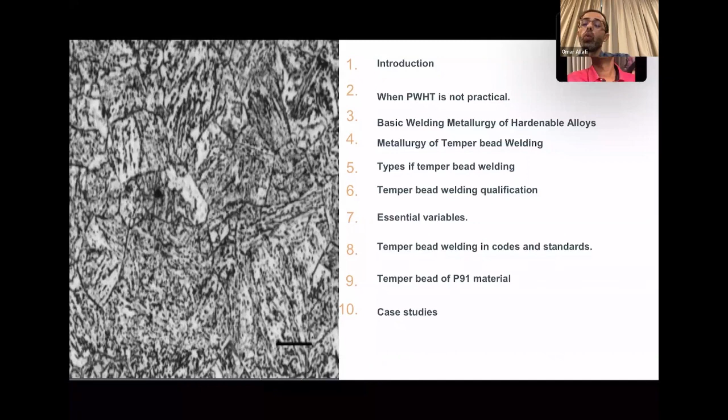We'll have a look at how temper bead welding is covered in different codes and standards, and different codes and standards have a lot of different things to say about temper bead welding. I'll also give considerations we should take when doing temper bead for P91 material, and we'll share a case study.

As an introduction, temper bead is aimed at controlling the mechanical properties of a weld joint and heat affected zone without the need for heat treatment. It provides the same mechanical properties as heat treatment. This technique was adopted in 2004 in ASME Section 9, but that doesn't mean it was not in use long before this date.

We have a record of using temper bead welding since the 1980s, especially in nuclear plants where accessibility is a concern. The first technique used in the 1980s was the half-bead repair using SMAW electrode.

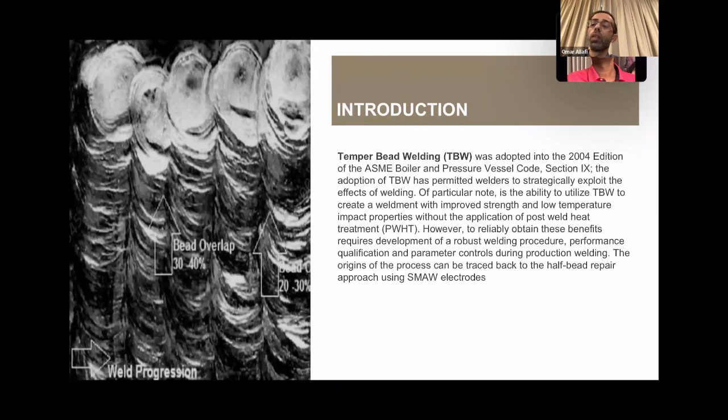So how did it come to existence? If you look at the difference between single pass and multi-pass welding, you'll notice that in multi-pass welding, the residual stresses are much less than in single pass welding.

This is in part because the small welding filler size we use when welding a multi-pass joint will temper and normalize the weld and base metal, and also refine the grain size of the heat affected zone.

As you can see here, this is a weld joint welded using a small filler of 3.25 mm, and the white area is the recrystallized area, which is affected and tempered by the subsequent weld runs. But here the white area is much less, so tempering and refining is not as effective.

In addition, the small electrode size results in a smaller heat affected zone, as shown here. This is how temper bead came to existence.

So they asked: can we set forth critical parameters to control the mechanical properties by applying the subsequent run, ensuring that the hardness and toughness do not exceed the limits in the base metal? This is where it started, and as I said earlier, it started with the half-bead approach.

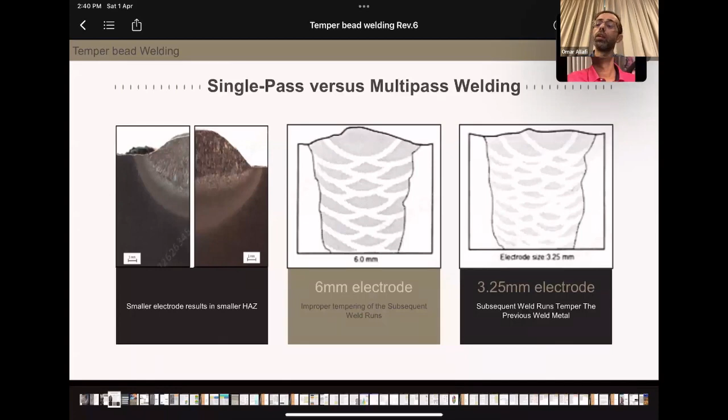When it comes to PWHT, I always ask this question: what is wrong with PWHT? We don't tend to look for alternatives to PWHT when we are manufacturing or fabricating a new vessel. No, we don't do this.

So applying PWHT becomes a concern when you don't have time to do it. This is applicable when you're in a shutdown or turnaround, or sometimes when you don't have accessibility. So time here is the main concern.

You give me time, and all people in the inspection field or welding field know that if you give me time, I can give you everything. So here the most critical factor that governs the repair methodology is time, and we know that PWHT is time consuming.

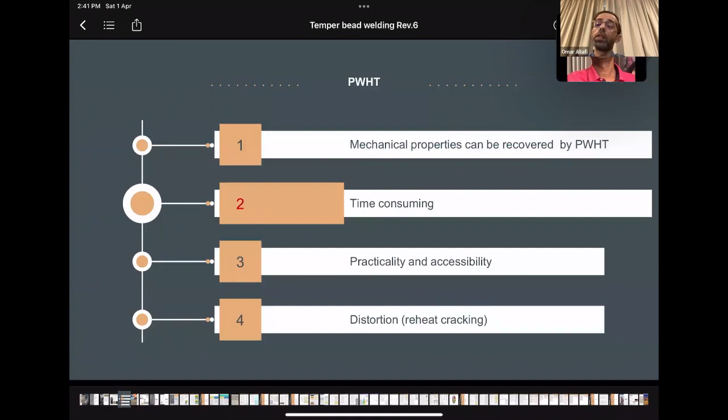In addition, it's not always practical, and can itself result in distortion or reheat cracking. So if there's a way to ensure or adjust the mechanical properties of the base metal and heat affected zone without the need for PWHT, that would be great. And as we'll see in the upcoming slide, temper bead can do this.

Before we go to this, I would like to give a brief introduction about the metallurgy of hardenable alloys in the welding effect and how welding will change the mechanical properties.

Welding will subject the base metal to a high temperature that can result in creation of the heat affected zone and increase the hardness, and sometimes result in enlargement of the grain size because of the fast cooling after welding. So this heat affected zone is the concern. This is where the highest hardness can result after welding. And this is where we have a coarsened grain area where toughness might be impacted.

It is clear in this graph that the coarsened grain area is adjacent to the fusion line of the weld because of welding. This, of course, is because it goes above the transformation critical temperature, and there is a phase change that will occur from ferrite to austenite, and upon cooling, the martensite will form, and upon heating, the grain size will enlarge.

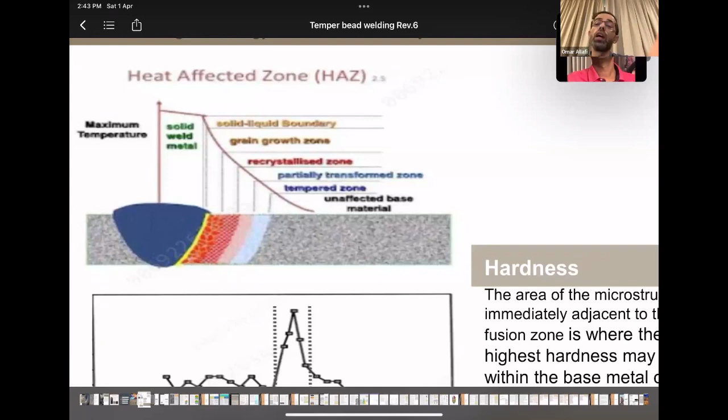This increase or enlargement in the grain size will affect the toughness, and the fast cooling or formation of martensite can result in high hardness values. As we can see here, this is where the maximum hardness can occur, just near the fusion line of the weld.

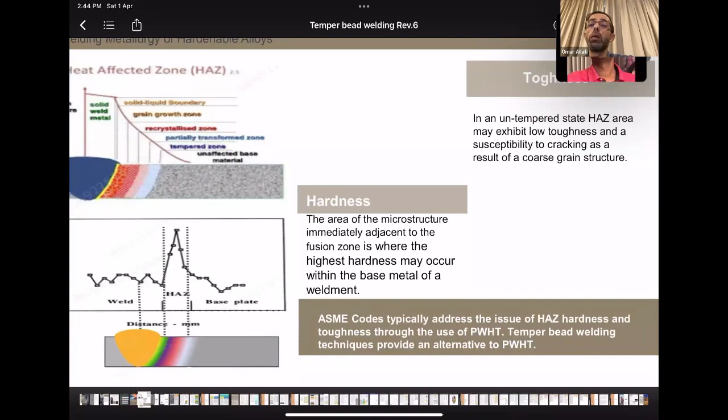So ASME codes address this issue and reduce or restore the mechanical properties by PWHT. So can temper bead do this? And the answer, as we'll see, is yes.

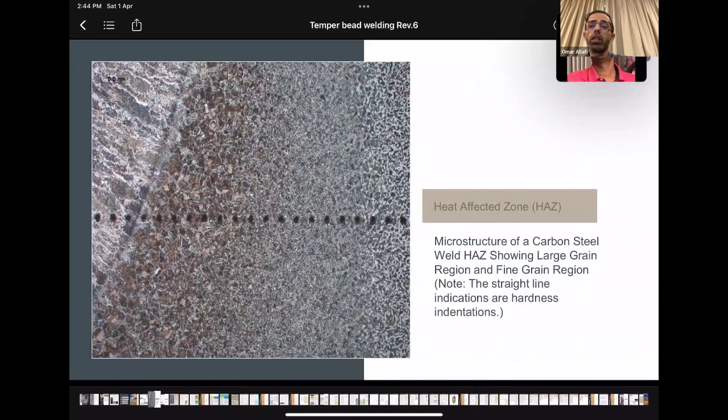This is another photo for the coarsened grain area. It is clear. This photo is for carbon steel welded using high heat input. This is the reason why the grain gets coarsened or enlarged near the weld toe. And this dashed line is for hardness indentation.

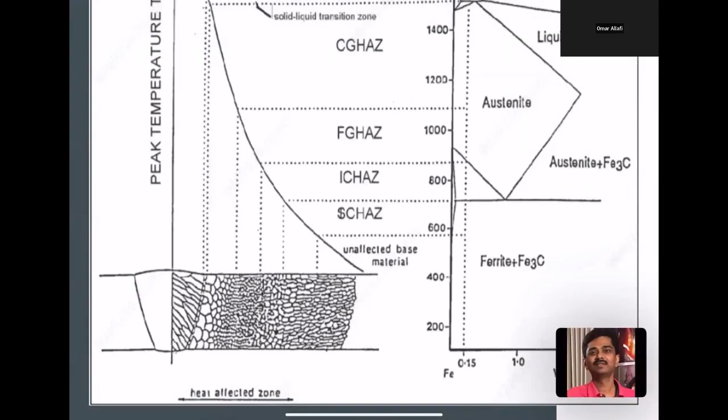This is the relationship between the peak metal temperature of a weld and its correlation to the iron carbide phase diagram. In this area, this is where the grain gets coarsened, where you have enlargement in the grain size, of course, because of heating during welding, and this is the fine grain heat affected zone.

This is the intercritical, where the temperature goes up above the transformation temperature, or this line. This line here is referred to as AC1. This is the lower critical temperature, which is around 745 degrees Celsius.

This area is where tempering occurs. So this is where we get the mechanical properties restored. So what we need to do is to make this area similar to the tempered area or subcritical heat affected zone, where the grain size is tempered, the toughness is restored, and hardness is similar to the unaffected base material.

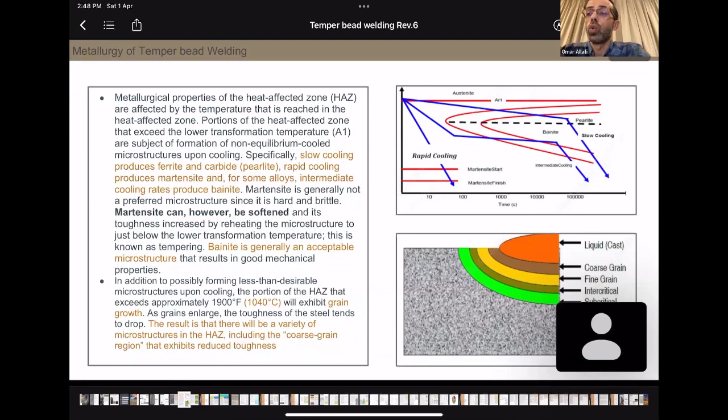Martensite, however, can be softened, and the toughness of martensite can be restored. So in this chart, we see how rapid cooling ends up with a different microstructure.

As I said, the essence of temper bead is to temper the previous weld by applying a new weld run, so you need an overlap. What we are doing is controlling some parameters when applying a weld run over a previous weld. This new weld run will temper the previous weld and the heat affected zone as well. So mechanical properties will be restored, hardness will be reduced, and toughness will be within acceptable limits.

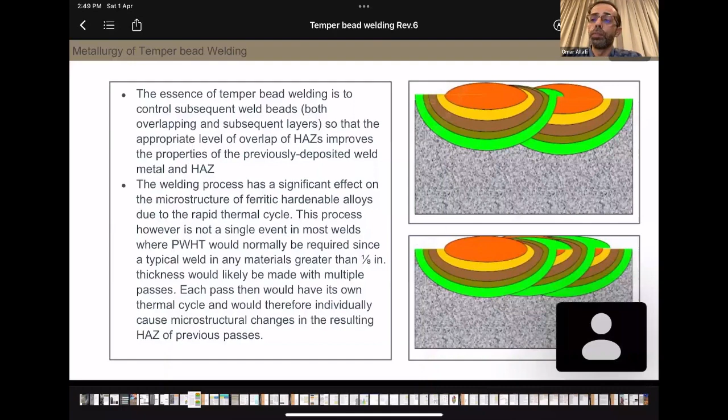Types of temper bead. As I said earlier, the first temper bead type used was half bead weld repair using SMAW. This technique used SMAW electrodes. The procedure included preheating before grinding the defect or starting the welding, then grinding.

Then you use a small electrode for buttering the weld. Then you grind half of the weld run applied in the first layer, and apply a second layer using a bigger electrode diameter, and these layers are applied progressively, with the remaining layer applied using a larger electrode diameter. So after each layer, you will remove the half bead of the existing weld.

The disadvantage of this technique is that it is quite difficult to judge the amount of metal being ground away. This is one of the most critical parameters. So half bead welding is not preferred by many owners, because it depends on the competency of the welder. Removing half of the bead and controlling the overlap may seem easy, but it's quite difficult.

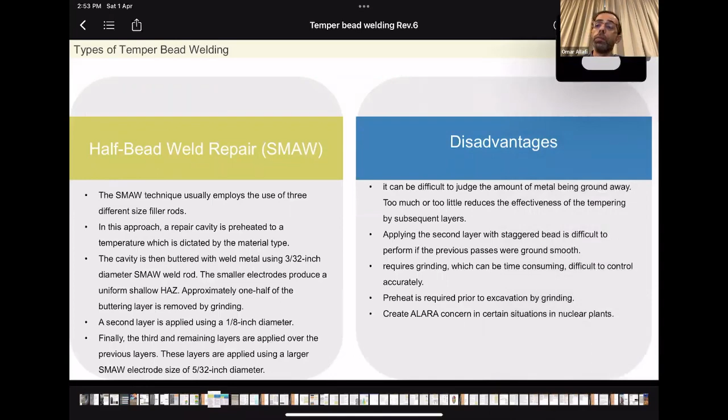In 1986, a new temper bead technique was developed, which is the alternate temper bead repair technique. It was called alternate because it was an alternative to the well-known half bead technique. It was recognized by ASME through a code case for P number 1 and 3, 12A, 12B, and 12C under code case N-432 in 1986 until 1992.

This technique was used extensively between 1986 and 1992 because there is no preheat used during the grinding, and there is no grinding of the weld bead, and it requires less preheat during welding. This is the main advantage of this technique.

You can apply it by preheating the repair area to 150, buttering a total of 6 layers. In each layer, you are increasing the heat input for the first three layers. You use a higher heat input in the second layer than the first one, and again a higher heat input for the third layer compared to the first and second layer.

This will result in increasing the temperature of the base metal above the lower critical temperature. This is AC1. I can go back to the chart just to show you this temperature I'm talking about, the lower critical temperature. I'll be using this critical temperature in my presentation, and I'll refer to it as the AC1 critical temperature.

So this will take the base metal temperature above this lower critical temperature, and upon cooling, transformation to martensite and bainite will occur. This will enhance the toughness and reduce a little bit the hardness, but it's limited.

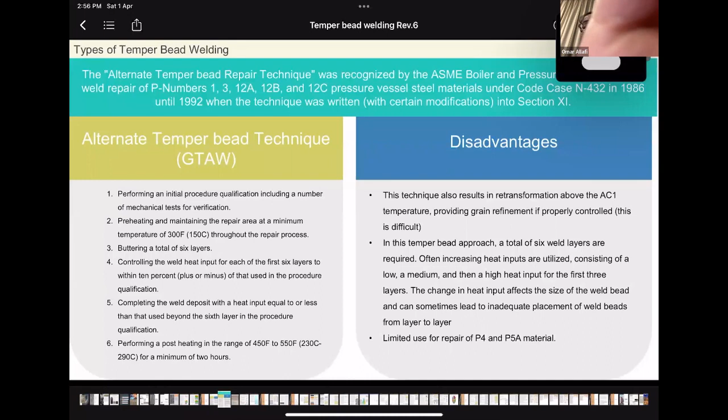It has limited use for P number 4 and P5A material, P11 and P22 material. So the main concern is that this technique results in retransformation above AC1.

This is a comparison between the half bead and alternate repair procedure operation. As we can see, the advantages of the alternate procedure over the half bead procedure are...

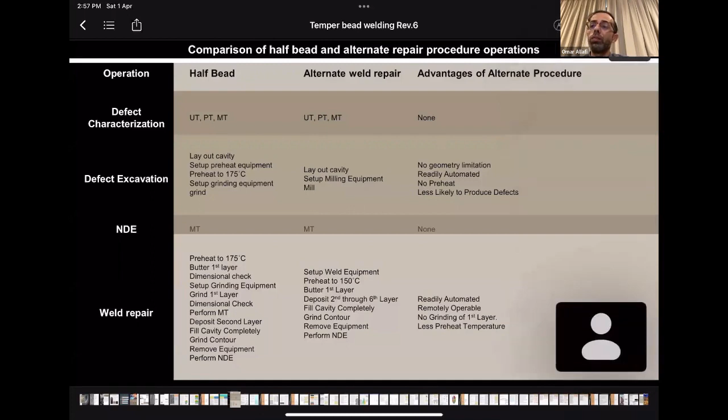Here, there's no geometry limitation, and it's readily automated. The technique used in this method is automatic GTAW or TIG welding, with no preheat, and less likely to produce defects. So it is better than SMAW, remotely operated, with no grinding of the first layer, and less preheat temperature.

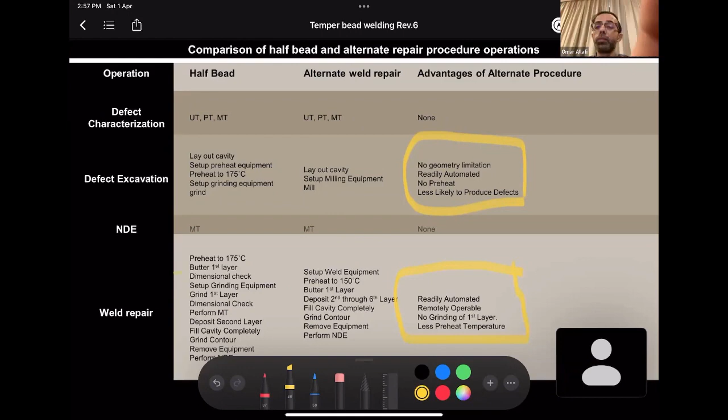Another technique was developed, which is the consistent layer temper bead technique using automated GTAW or manual SMAW. The good thing in this technique is that it doesn't take the base metal temperature above the lower critical temperature, AC1. So it is something similar to PWHT.

It can restore the mechanical properties of the base metal, similar to PWHT. But as we can see here, when depositing the second weld layer, the fusion zone and heat-affected zone height of weld layer 2 is such that it is always less than the combined weld layer.

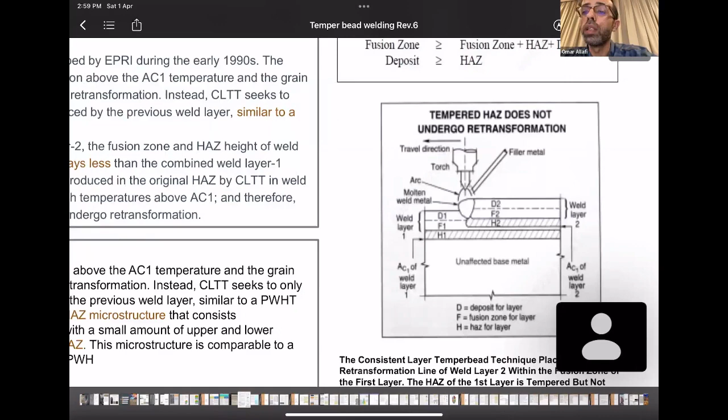So this is the weld bead, the weld layer 2 fusion zone and heat-affected zone height of weld layer 2 is always less than the combined weld layer. This is an overlapping. This is nothing but overlapping. So this is how they control the tempering effect and control the mechanical properties of the base metal by overlapping, using, as I said, GTAW or SMAW.

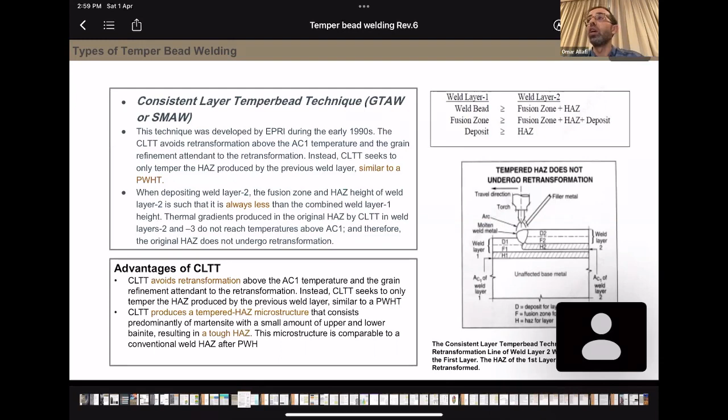So the advantages of this technique are that it avoids transformation above the AC1 temperature and produces a microstructure similar to what is achieved by PWHT. The controlled deposition technique is one of the famous techniques still in use today. It can eliminate the coarse grain region within the HAZ, where creep and reheat cracking have presented problems at elevated temperatures. In this technique, you are controlling the heat input and heat input ratio, with an overlap percentage of 50% between the weld layers.

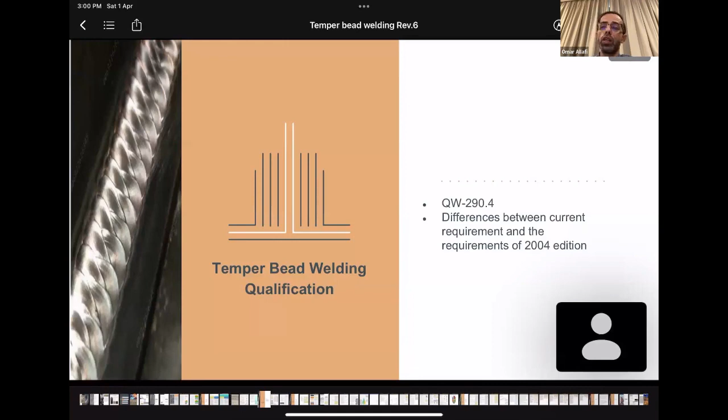So the differences between the current requirements and the requirements of the 2004 edition. We'll see how it was first adopted in ASME Section 9 in 2004. This is the famous table for temper bead, QW 290.4, where the essential variables are listed. I want to emphasize that these variables apply in addition to the variables applicable for the processes qualified as given in QW 250. What that means is if you're using SMAW, for example, for temper bead, you have the QW 250 essential variables and supplementary essential variables that are also applicable. So not only this table - and I'll explain why this is important.

So these essential variables, in addition to the essential variables in QW 250, are required and mandatory to be followed. When impact testing is required, the supplementary essential variables are also applicable for the qualification. In QW 250, you have the supplementary essential variables and the essential variables, and when impact toughness is required, the supplementary essential variables become essential. So all this is also mandatory. But we need to keep in mind that when variables listed here in this table conflict with or provide more stringent limitations than those in 250, the variables listed here shall govern.

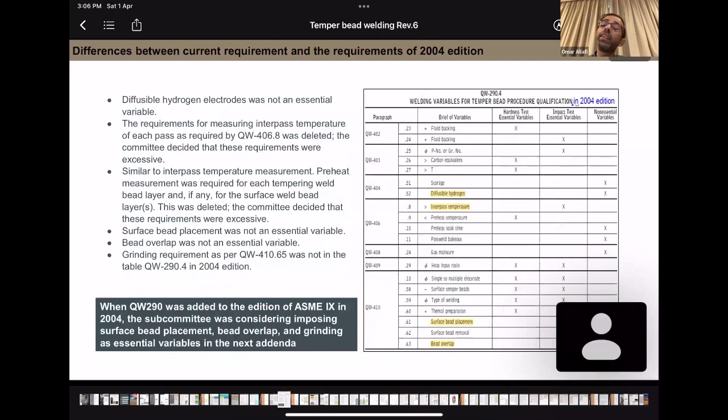Surface bead placement was not an essential variable. Bead overlap was not an essential variable. This means that if the WPS was qualified for half bead technique, you could use it for full bead technique - this is not possible in the current edition. Grinding requirement was not in the table either - it's not that it wasn't considered an essential variable, it just wasn't in the table. But there was a note stating that the ASME Section 9 subcommittee was considering imposing surface bead, bead overlap, and grinding as essential variables in the next edition, and they were added in the 2006 edition.

So we'll discuss all the essential variables of temper bead, and we'll go for fluid backing. So what do we mean by fluid backing? This is when you have water in the backside of the weld, used as a cooling medium.

It's quite interesting that this effect might work fine for hardness, but it's exactly the opposite for toughness. For hardness, the preheat temperature will control the hardness and result in better hardness values. The higher the preheat temperature, the lower the hardness value result in the heat affected zone.

But this is not the case when it comes to toughness. Toughness will be adversely impacted by the preheat temperature. And if you refer to QW250, you will see that there is a limit for the maximum preheat or increase in preheat temperature for the welding method.

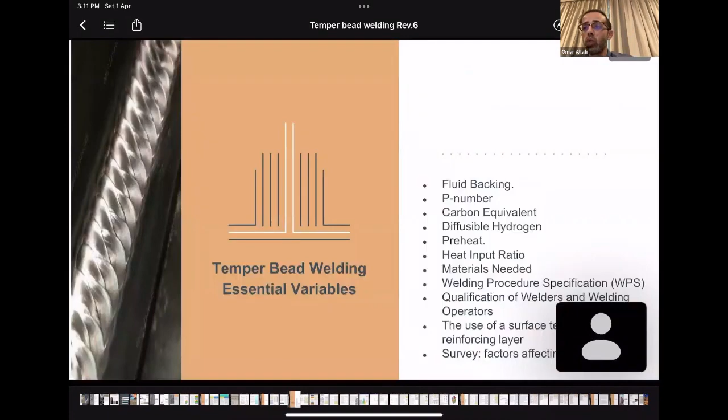So these variables don't work simultaneously - you cannot control hardness and toughness together. So you need to know why you are doing temper bead. This is why I would like to go here.

This is why you have 3 columns here: column A, column B, and column C. What you need to know is what actually you are controlling in your welding - is it hardness? Is it toughness? Or none of them?

So when toughness is specified in the original construction code, you have to follow column B. When it's not, and hardness is specified, you can choose column A. When none of them is specified, you can use column C.

But in this case, what kind of tests are required when following column C? It is the same requirement as the normal weld, which is QW451: the bend test and the tensile test. But for column B and column A, the required tests are the bend test in addition to toughness or hardness.

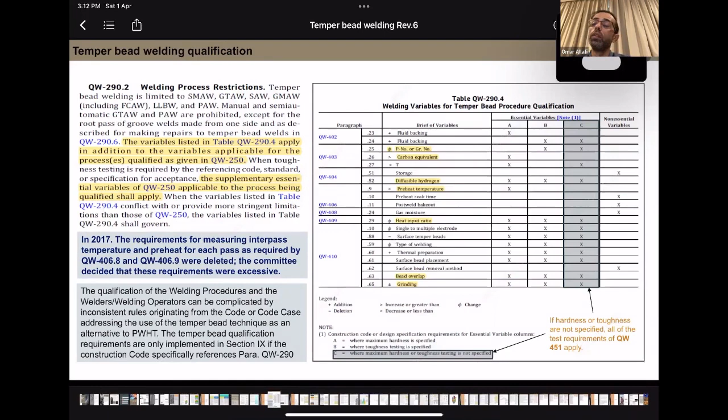So single or multiple electrode - this is a change from single electrode to multiple electrode or vice versa. When you change, you need requalification.

Surface temper bead - the deletion of surface temper bead, or change from a surface temper bead that covers the full surface to one only deposited along the toes of the weld. Sometimes the placement of temper bead is over the full surface of the weld, or sometimes it is placed near the toes of the weld to temper this area or the heat affected zone. So if you qualify using surface temper bead for the full weld, you cannot change it to beads only deposited along the toes without requalification.

In this case, requalification is required. The type of welding - the change from machine or automatic welding to manual or semi-automatic welding requires requalification.

This is applicable to GTAW because automatic GTAW is preferred compared to manual welding for a reason I will cover later on in this presentation, related to heat input ratio. So when you change from automatic welding to manual welding, you need requalification.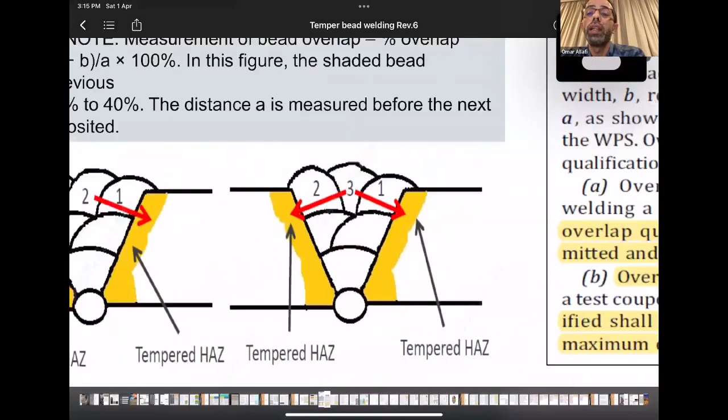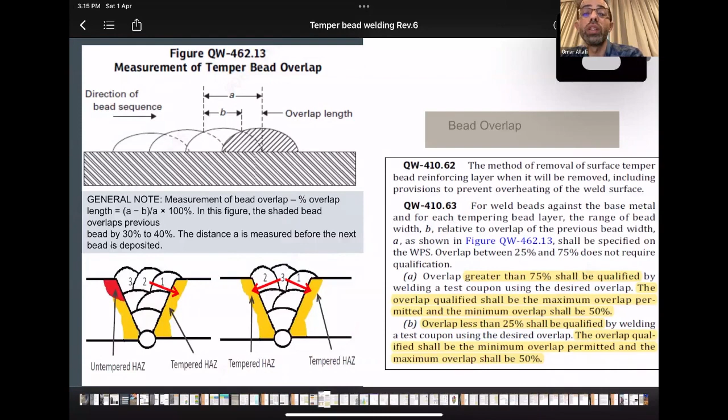But when it is done improperly, like the figure on the left side, the red zone is the untempered zone. So the sequence should be similar to this: 1, 2, and 3. And 3 is supposed to temper the heat affected zone of welder number 1 and number 2. This is where skill and experience is required. This is why temper bead is very difficult. You don't need only a competent and skilled welder, but you also need experienced welders who have experience in temper bead.

When using this technique, for qualification, when you want to have an overlap greater than 75, what should you do? Let's say I want to have an overlap of 80%. You have to make an overlap of 80% in the test coupon, but that will change the minimum overlap. It will not become within the range of 25 to 75. Now your new overlap value, which is 80, is the maximum, and the minimum is 50.

Similarly, when you are using a lower overlap value, like less than 25, you need to have a new test coupon matching the new overlap value. Let's say it's 20, and your maximum overlap in this case will become 50%.

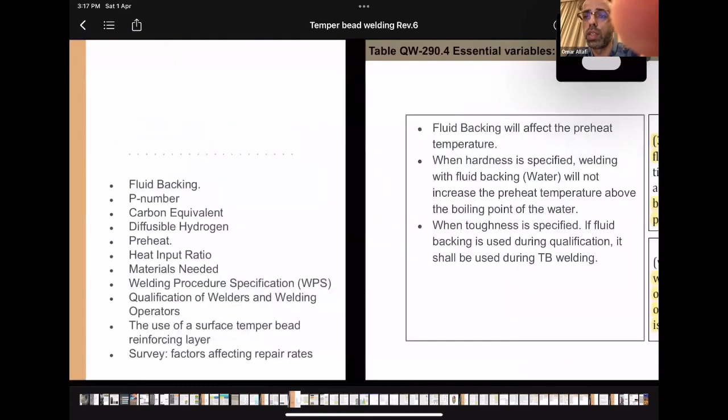P number. So I'll just go quickly and refer to this table. As you can see here, P number and group number are only essential variables when toughness is required. For column B, when toughness is required, and it is not required for hardness.

So does that mean that when hardness is specified for temper bead, the P number is not a factor? I mean, does that mean that if I qualify P22 material, I can use the same WPS for P11 and carbon half moly and normal carbon steel?

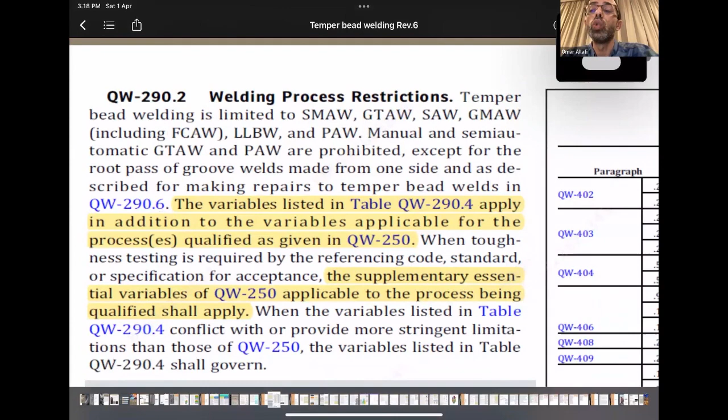The answer is no, simply because, as I said earlier, these variables listed apply in addition to the variables of QW-250. I'm giving this example just to emphasize that although it is not an essential variable here, it is an essential variable in the original or basic WPS qualification in QW-250. That's why that doesn't mean you can use this technique for different P numbers.

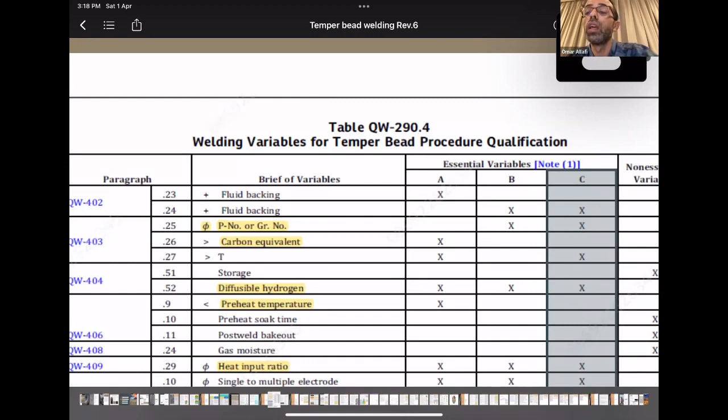So another factor, I'll go back to P number. When impact testing is required, it is not only the P number that is essential, but also the group number. Group number is also a critical variable when toughness test is specified, as different groups might have different chemical composition, and this will change the toughness properties or austenitic transformation temperature.

Just want to make a note here: for some materials, the P number was changed in 2010. So when you refer to an old WPS, you might find that the P number is different.

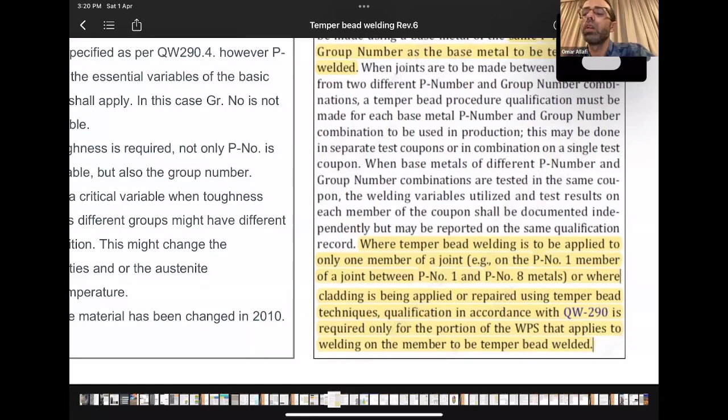Another point here: temper bead welding is to be applied only to one member of a joint, like in case of cladding, when you have a dissimilar weld joint, like carbon steel to stainless steel, and you apply a buttering of 309 on the carbon steel side, and this requires PWHT as per the specification or whatever. So you can use the temper bead for this joint only, and for this part of welding only, for buttering 309 filler to the carbon steel, and the subsequent welding will be done normally without temper bead.

Carbon equivalent. This is also an essential variable when hardness is specified. For the carbon equivalent, we don't refer to the normal chemical composition specified in ASME Section 2A, for example. You need to have the actual composition of all elements specified in the carbon equivalent equation.

You have different carbon equivalent formulas. All of them are accepted, but you need the actual composition. Sometimes it is difficult, because when you have high carbon, high chromium, or high Mn values in the steel, you cannot find a test coupon that has a higher carbon equivalent value.

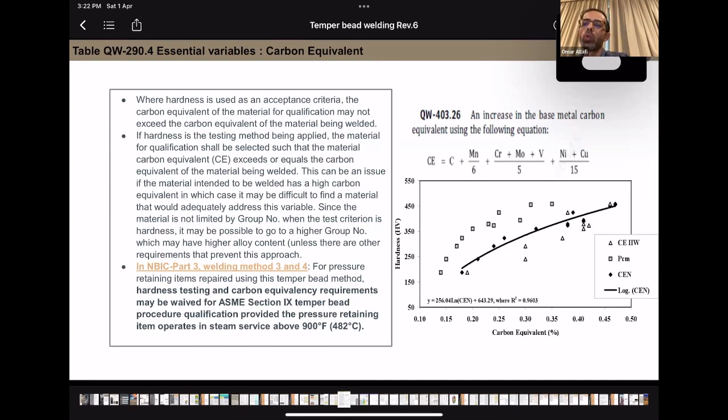So when you have a carbon equivalent for the base metal, the test coupon should have a similar or higher carbon equivalent value in order to be qualified for welding this base metal.

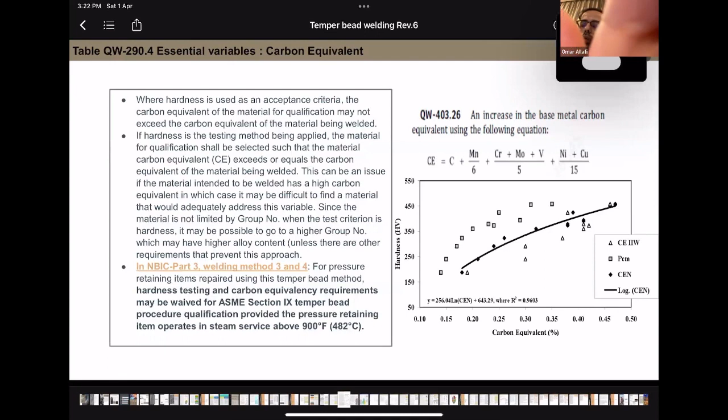And again, this is an essential variable only for when hardness is specified. As we can see in this chart, carbon equivalent can affect the hardness values. The higher the carbon equivalent, the higher the hardness you will get after welding.

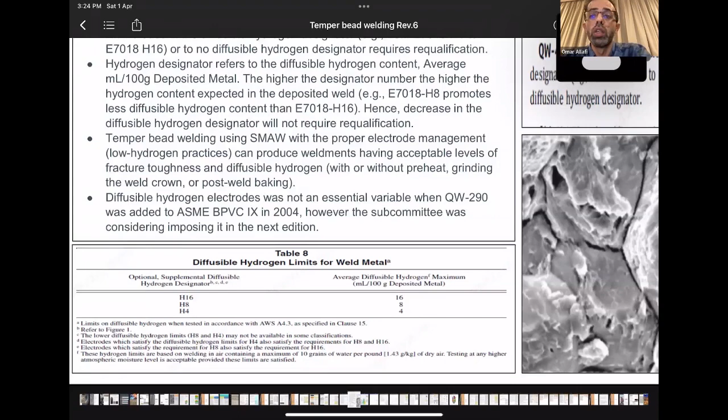Diffusible hydrogen is another concern. This is also an essential variable for both toughness and hardness. The increase in diffusible hydrogen will require a requalification. Why increase, and what do we mean by diffusible hydrogen? We have a hydrogen designator in the electrode specification, and these numbers are given in Table 8 of ASME Section 2 Part C. For example, H16 is the average diffusible hydrogen expected in the deposited weld, in milliliters per 100 grams deposited weld - this is 16. The higher the value, the higher the expected hydrogen content in the deposited weld. So increasing the diffusible hydrogen designator requires requalification, whereas reducing it doesn't.

So if the WPS is qualified using H8 hydrogen diffusible designator, you can use H4 without requalification, but you cannot use H16 without qualification. Why is diffusible hydrogen important? Because it helps prevent hydrogen induced cracking.

So hydrogen-induced cracking, as we know.

Can you see my screen now? Hello? Yes, it is clear. Yes, yes. Oh, okay, sorry.

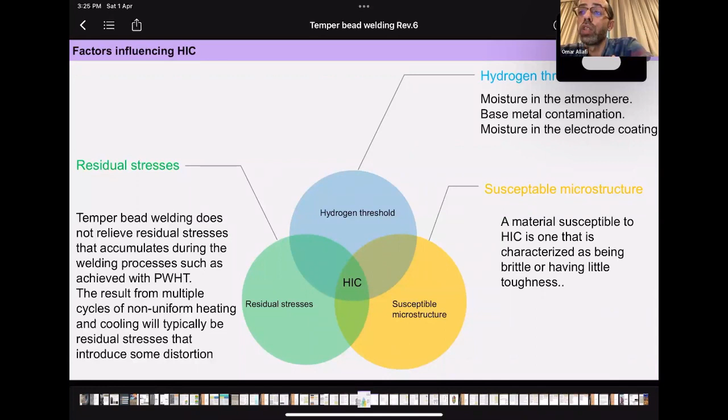Okay, hydrogen-induced cracking can be affected by three factors: the hydrogen threshold, residual stresses, and susceptible microstructure. The diffusible hydrogen in the electrode, any moisture in the atmosphere or base metal contamination, or moisture in the electrode coating, can increase the hydrogen content and increase the likelihood or probability of having hydrogen-induced cracking.

Also the residual stresses - what I'm trying to say is that temper bead's intent is not to relieve residual stresses, but to control mechanical properties. So the residual stresses after temper bead are always there. You have residual stresses, yes, less than normal welding, but you still have residual stresses, and susceptible microstructure.

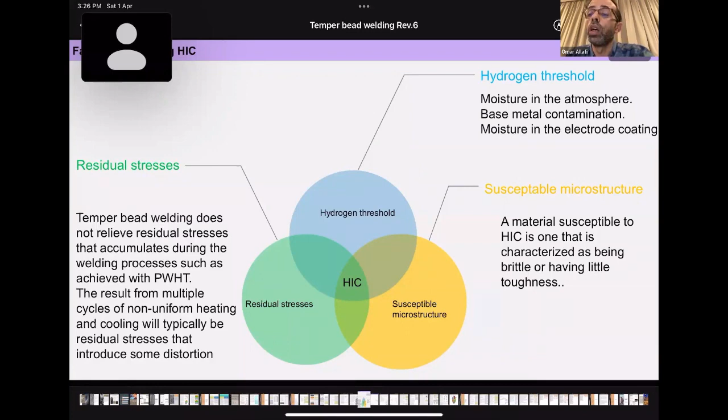What I mean by susceptible microstructure is that HIC is characterized by being brittle or having little toughness. So the lower the toughness, the higher the chances for hydrogen-induced cracking. As we can see in these charts, temperature on this curve affects the diffusivity of hydrogen.

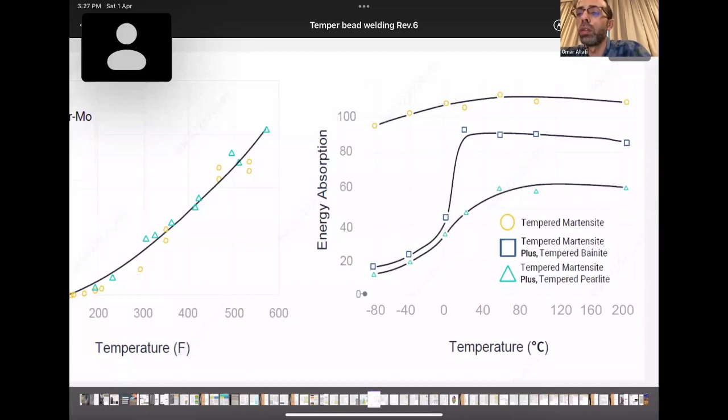The higher the temperature, the higher the diffusivity of hydrogen. And this is the temperature and toughness relationship - this is for tempered material, but when the material is untempered, you will not have the same values. So this might also increase the chances to have hydrogen-induced cracking.

Preheat - as I said, preheat is good for hardness and not good for controlling toughness. So preheat temperature is an essential variable when hardness is specified. That's why it is an essential variable for method A, which is hardness.

So slower cooling rate results from higher preheating temperature. When you start with higher temperature, the cooling rate will be slower. Why? Because it lowers the thermal conductivity of iron and steel.

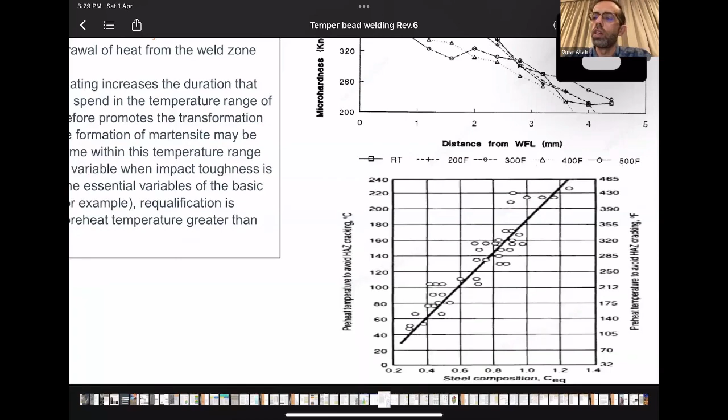In this chart, you can see how steel composition and carbon equivalent relate - what is the preheat temperature required for any carbon equivalent. This is, of course, again because it's required when hardness is specified. The preheat temperature here can be used using this chart. This is how we can estimate the preheat temperature for a steel material.

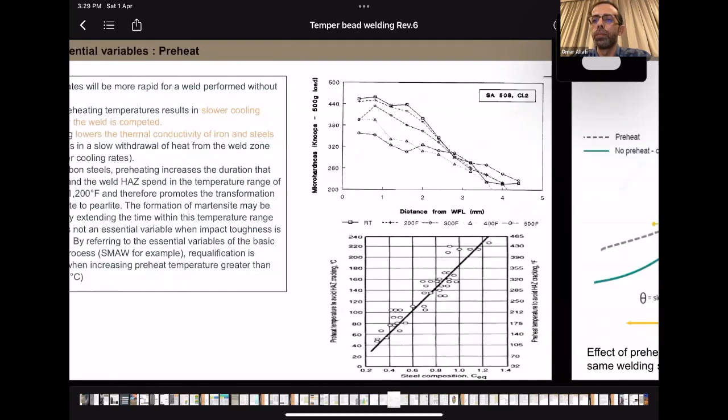And these charts can show how the cooling rate will be lower when preheat is used. In this chart, you can see a faster cooling without preheat, but when you preheat the joint, the cooling rate will be slower.

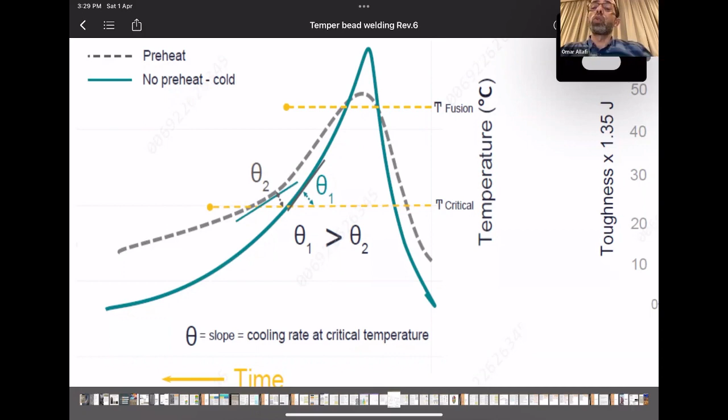So this will also impact the toughness, as we can see here with 260 degrees Celsius how the toughness is impacted, whereas at 93 it is a little bit higher, and without PWHT it is also higher. So there is an adverse impact of preheat on the toughness of the base metal.

The heat input ratio - this is where I want to cover the point of using automatic GTAW, and what do we mean by heat input ratio. This term is only related to temper bead. So in basic welding qualification, you won't see this variable listed as an essential variable for any method, because it is only related to temper bead.

So what we are doing is that we have a heat input ratio between any weld and the subsequent weld run, and normally it is 1.3 to 1.8, developed and proven for P4 and P5A material to control the hardness and toughness of the weld. Heat input is not the factor that controls the mechanical properties of the base metal or heat affected zone when using temper bead.

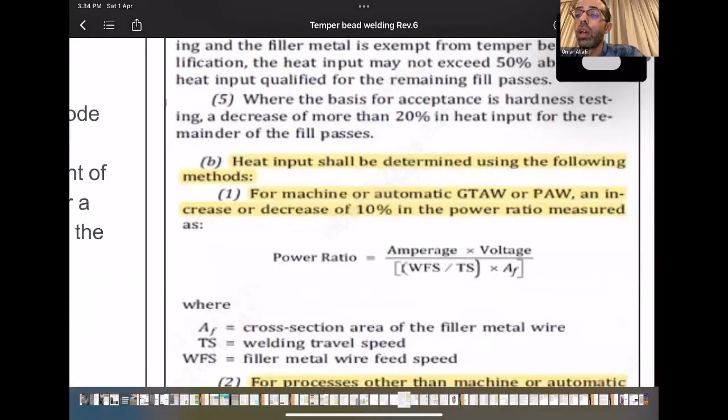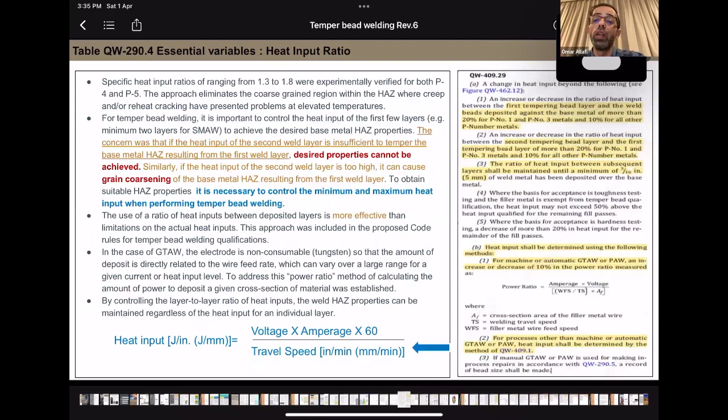In the power ratio, we can see that you have the cross section of the filler wire and the filler wire feed speed. So it depends on the feed rate of the filler wire and the filler wire cross section. This power ratio is used to control the heat input ratio when using GTAW techniques. And of course, automated welding is a lot better at controlling the heat input or power ratio than manual technique, which is why it is preferred. There is an additional requirement for using manual GTAW for temper bead as specified in section 9.

Okay, so for temper bead qualification, the material should be similar, and we should have the same WPS. The product form is not critical; plate may be used for a WPS qualified on pipe. If hardness is specified...

then you have a carbon equivalent, and this carbon equivalent might cause a problem when selecting a test coupon, because you need to take a higher carbon equivalent value. But this can be resolved by changing the group number. In the case of hardness, the group number is not an essential variable, so you can change the group number and select a test coupon with higher carbon equivalent to qualify your WPS.

The filler wire should typically be the same composition as the original weld, but sometimes in some studies it is claimed that using a filler wire with lower strength is preferred. This is due to the fact that the absence of typical PWHT might result in higher than expected strength.

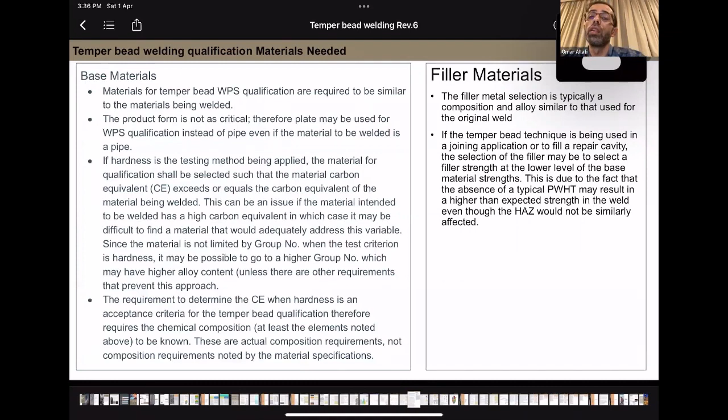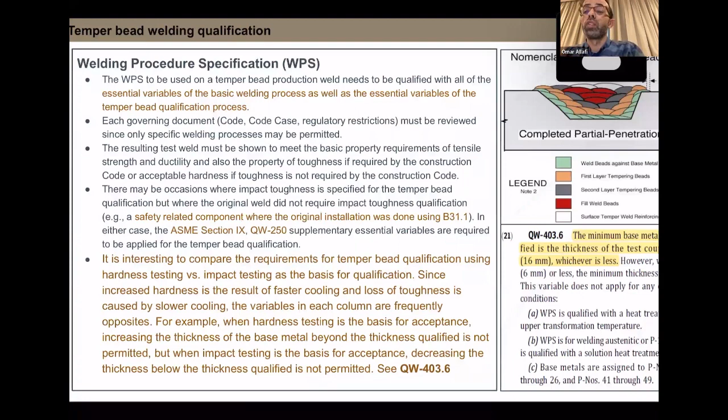In temper bead procedure qualification, I'll talk about the last paragraph, which is how the requirement of temper bead using hardness versus impact testing as the basis can change everything. So here, for example, I'm taking thickness as an example. We saw that increasing the thickness is not okay, but reducing the thickness is okay for hardness, while for impact testing, decreasing the thickness below the thickness qualified is not permitted.

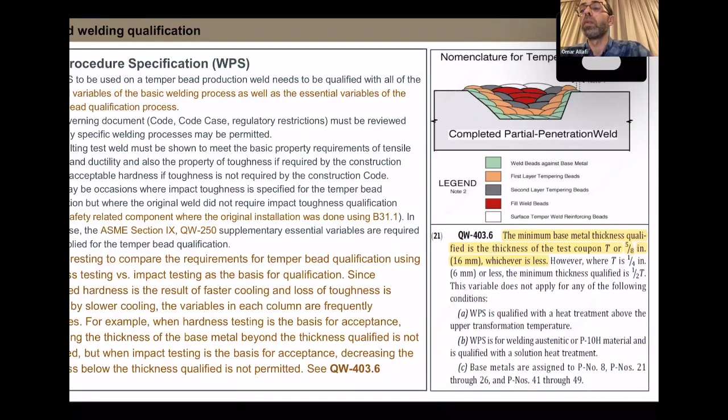And I'm referring to this paragraph in 403: the minimum base metal thickness is the thickness of the test coupon, or 16 mm, whichever is less.

So in some cases also, like in B31.1, you have a safety concern where there are occasions where impact testing is specified for temper bead, but the original weld did not require impact testing qualification. So there is a note in B31.1 where some material at low temperature might reduce the impact toughness properties.

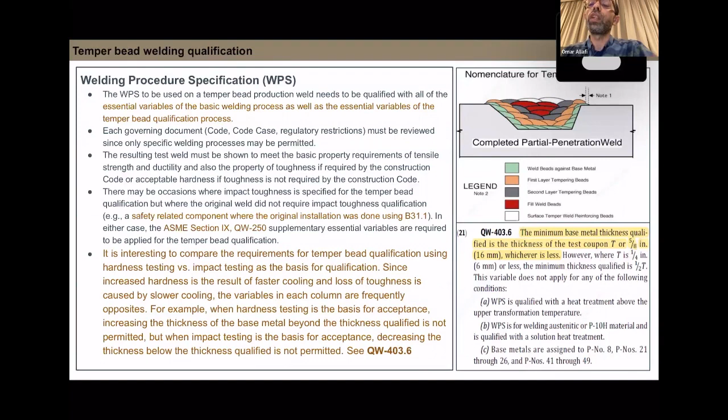And this is the reason why sometimes we need to perform temper bead using impact toughness testing. So sometimes you find it specified to follow this method, impact toughness, although it is not required by the construction code. But because sometimes the impact toughness at room temperature might decrease when welding using temper bead, you need to follow column B, the toughness method, as a requirement. You need to satisfy all requirements for the toughness requirement.

Qualification of welders - as I said, this technique depends mainly on the competency and experience of the welder. And as I explained earlier, how overlap can result in untempered HAZ.

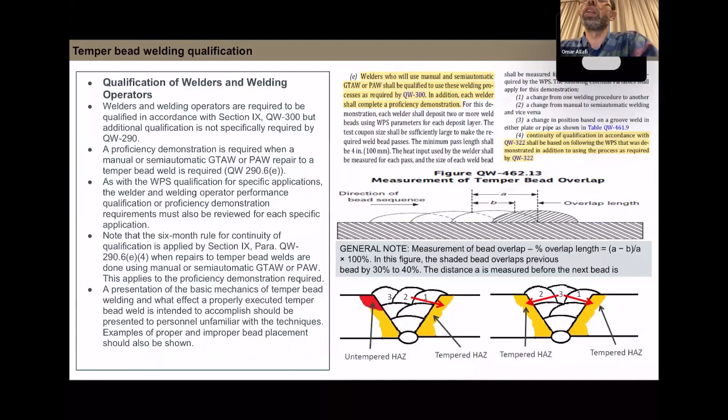Here I would like to just cover that the continuity of qualification in accordance with QW shall be followed when using manual methods. Note that the 6-month rule for continuity is applied where repair or temper bead are done using manual or semi-automatic GTAW or PAW. So when you are using manual or semi-automatic GTAW, the 6-month rule applies, and you need to have a proficiency demonstration for all welders using manual or semi-automatic GTAW or PAW.

This is the temper bead qualification nomenclature for temper bead welding in ASME Section 9. You can use any groove shown here to qualify your WPS.

The temper bead placement, or the distance S between the temper bead or the surface temper bead, is usually in the range of 2 to 4. So when you change this within 1.5, it is acceptable. This is the limit for this distance, usually for the surface temper bead placement.

We are adding this to temper the subsequent weld, and sometimes it can be removed. The surface temper bead can be removed. This removal of the surface temper bead is not an essential variable, but it is required in some codes and standards. This distance is within 1.5, and within 1.5 requires no qualification, but usually it should be between 2 to 4 mm.

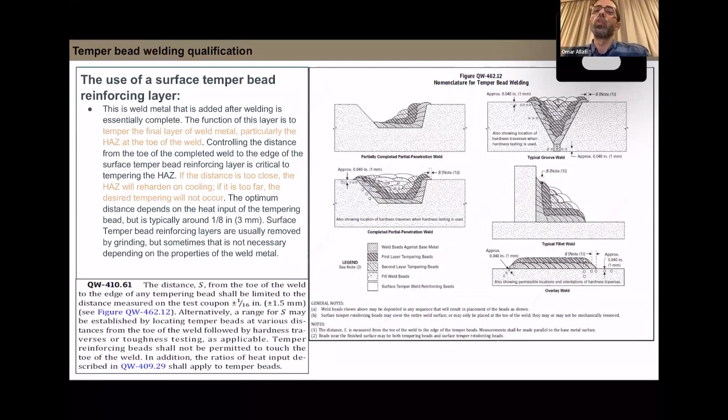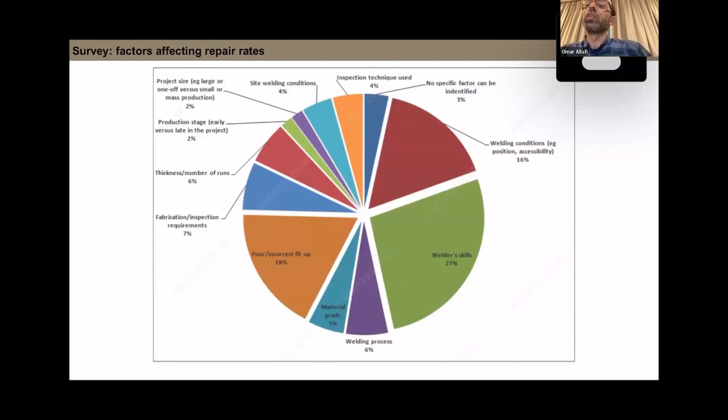So these are the factors affecting the repair rates, and as we can see, welder skill is important. Why am I talking about competency of welders? Because the majority of failures - 27% of weld failures - are attributed to welder skill or poor workmanship in preparation for welding. So welder competency is again very important when it comes to temper bead.

Codes and standards - I will start with Section 1. In Section 1, the only method recognized by ASME Section 1 was the half bead, but in 2021 they changed and are now accepting both half bead and full bead. And this is, I think, the only code where it specifies an acceptance criteria for hardness, and it is only allowed for P number 1 and P number 3 material.

This is, of course, after the PWHT. So it's not like we're having a weld joint that is being welded and we don't want to do PWHT. No, but this is when the PWHT is applied, and when repair is required after applying the PWHT and before the hydro test, you want to do this repair - you can apply either the half bead technique or the full bead technique.

So here, the total depth shall not exceed 10% of the full thickness, and post-weld bake out is required, although H4 diffusible hydrogen designation is mandated. So they're mandating using H4 hydrogen designator, and they're mandating the post-weld bake out to reduce the likelihood of hydrogen-induced cracking.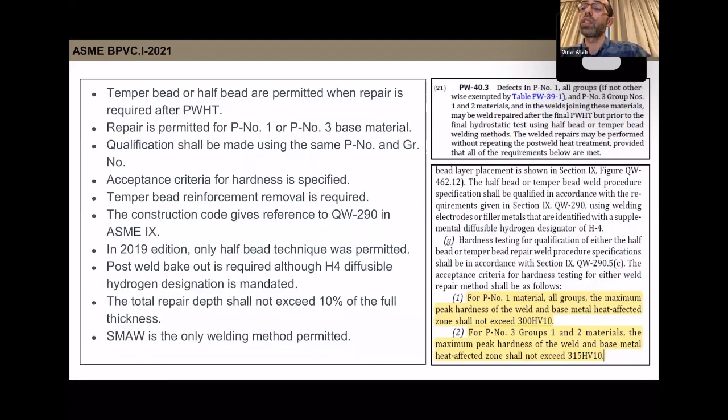This post-weld bake out is a non-essential variable in QW 290.4. In Section 3, the post-weld bake out was also required with H4 hydrogen diffusible designation. The construction code gives reference to 290 in ASME Section 9. The maximum area of individual repair based on the finished surface shall be 500 square inches, and the repair is permitted for P number 1 and P number 3.

Temper bead weld repair was permitted in Section 3 under code case N594, but in the code the only materials permitted are P number 1 and P number 3. No acceptance criteria is specified for maximum hardness in the HAZ.

In ASME Section 8, only half bead is allowed. The permitted materials are P number 3 group 1, and P number 1 and P number 3 groups 1, 2 and 3. The permitted welding processes are SMAW, GTAW, GMAW including FCAW, PAW, and SAW. Although SAW is one of the accepted methods in ASME Section 9, it is only acceptable in ASME Section 8 Division 1. So they have a preheat requirement of 175.

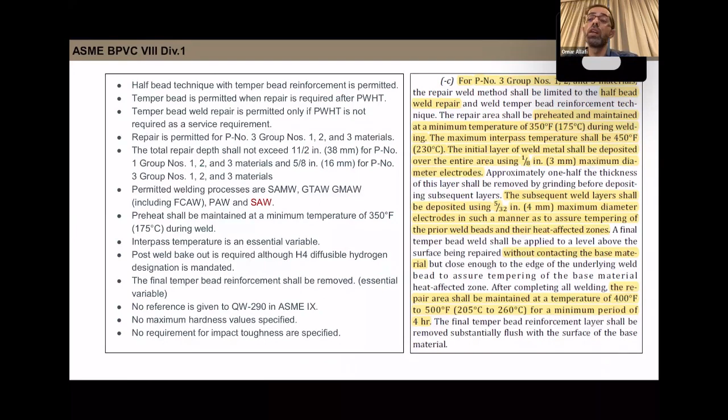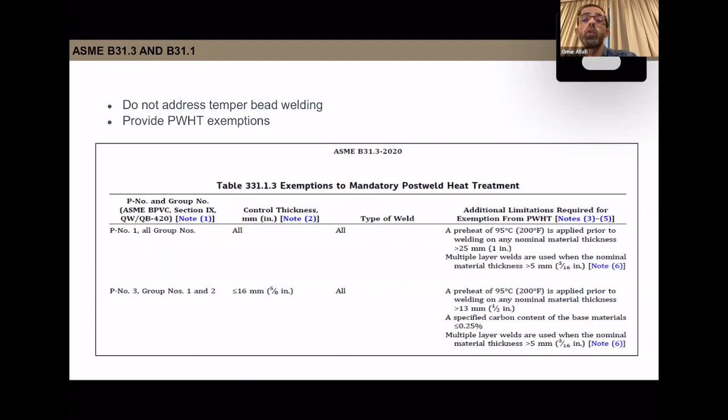In B31.3 and B31.1, they do not address temper bead welding. They provide PWHT exemption by preheat. And in PCC2, although it is a non-construction code, it provides a method of repair of equipment, and gives the option to use temper bead when repairing carbon steel pressure components or pipelines having carbon equivalent greater than 0.45.

No acceptance criteria also for hardness. It gives reference to Section 9 when the requirement of temper bead is not specified in the construction code.

In API 510, this is controlled deposition welding. This is applicable for P number 1, P number 3, and P number 4. The permitted welding processes are SMAW, GMAW, GTAW. It doesn't specify whether it's manual or automatic. They're accepting temper bead and half bead.

Diffusible hydrogen is H8. Post-weld bake out is required and can be omitted when using H4 hydrogen designated electrodes. When shielding gas is required, the gas shall exhibit a dew point that is no higher than -50. This is for GTAW. No reference is given to QW 290.

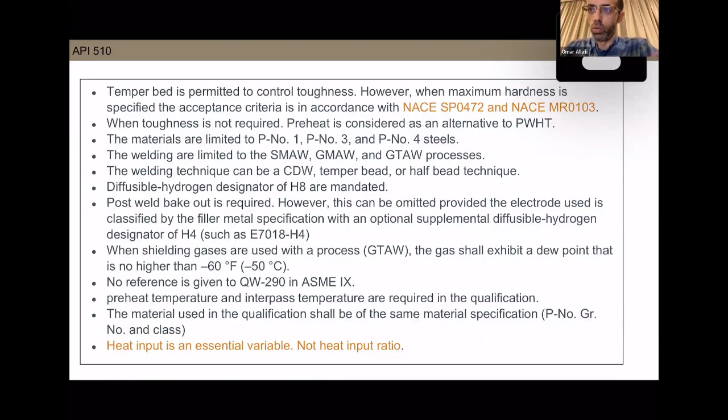So what they are doing is controlling the heat input of each layer to be followed as per the WPS qualification. But since they don't give a requirement or reference to QW 290, you cannot ensure that you are controlling the heat input ratio, because they don't give a reference to QW 290 for temper bead welding.

For NBIC Part 3, we have 7 methods. Methods 2 through 5 are for temper bead, and the last 2 methods are for controlled deposition. In each method, I listed down all the materials permitted and the chemical composition of this material.

In weld method number 2, this is when impact testing is specified. So they have an additional requirement for shield gases.

So this is the moisture requirement in QW 290.4, which is a non-essential variable, but they're making it essential here. Full thickness is permitted only for P4 and P5A material.

It is not permitted, or permitted under certain conditions, when the tube to header joint is full penetration and volumetric examination is done after welding. The reason is that they don't want to permit this technique for all weld joints. They specified the use of full penetration or full thickness repair for P4 and P5A. They limited the use of this technique only to tube to header joints.

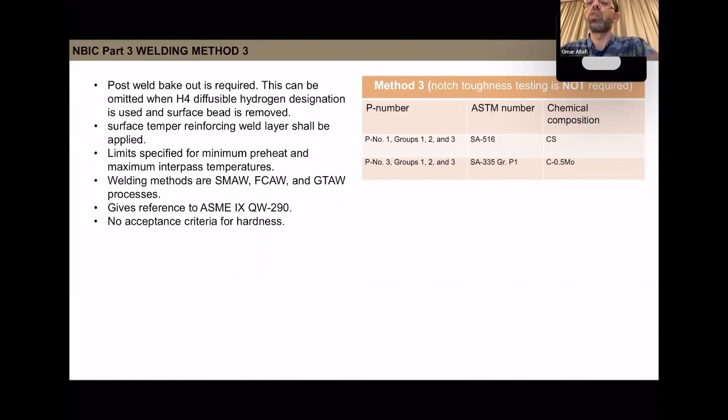So welding methods SMAW, FCAW, GTAW process, they give reference to QW 290. Method 4 is mainly for P number 4 and P number 5A, and this is without impact toughness. So yes, they give reference to 290, and again, full thickness repair similar to method number 2 is permitted for tube to header joints. Post-weld bake out is required and can be omitted when using H4, and the surface bead is removed.

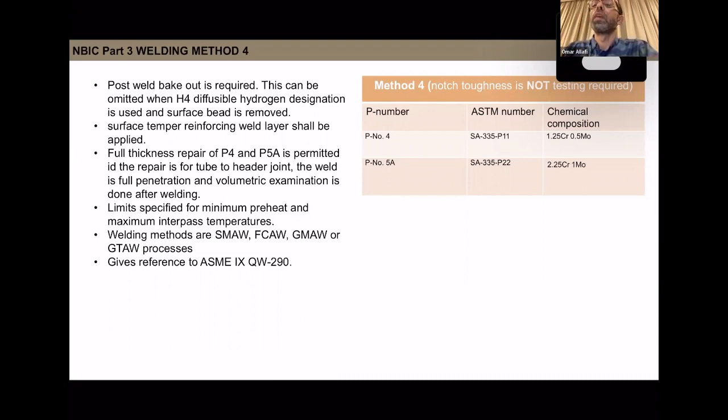Welding method number 5 is for dissimilar welding. The P numbers listed here are for the base metal, and can be welded to P number 8, like 300 series stainless steel, or any nickel alloy P number 42, 43, and 45. So this is for dissimilar welding.

So when the construction code specifies toughness, you should go to method 2. When it doesn't specify toughness, you can go to method 3 or 4.

Number 6 is using austenitic filler for similar weld, or for P91 material, the 9 chrome 1 moly, using controlled deposition. This is limited to butt welds in tubing, 5 inches or less in diameter. Stringer beads only are permitted. Limits specified for minimum preheat and maximum interpass temperature are specified.

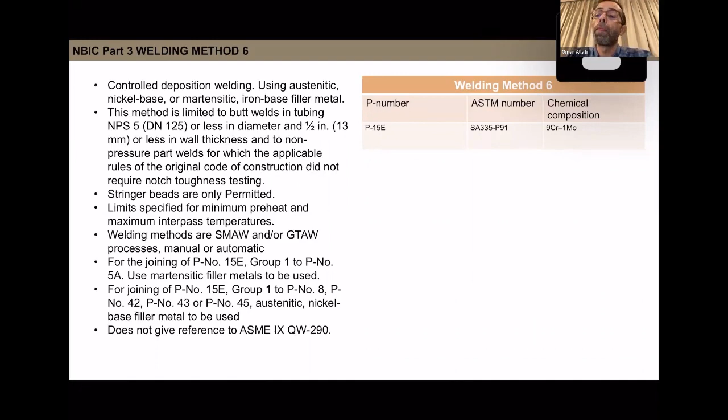And for P number, or welding number method, this is also for 9 chrome material welded to 5A or P8 or P42. This is also limited to tube-to-tube header where the tubes are 5 inches or less. Again, stringer bead only is permitted. Minimum preheat and maximum interpass temperature are specified.

The consideration of P91 material: in the repair of service-exposed P91 material, we know that the strength can be degraded. So in this case, in some studies, they claim that the application of a weaker filler metal to more closely match the strength of the material after exposure to high temperature during service can be used.

But this is not the case in NBIC method 6 and method 7. They mandated using matching filler wire, which is B9. So it is critical also that preheat and interpass temperature be lower than the martensitic formation temperature. This material is martensitic steel.

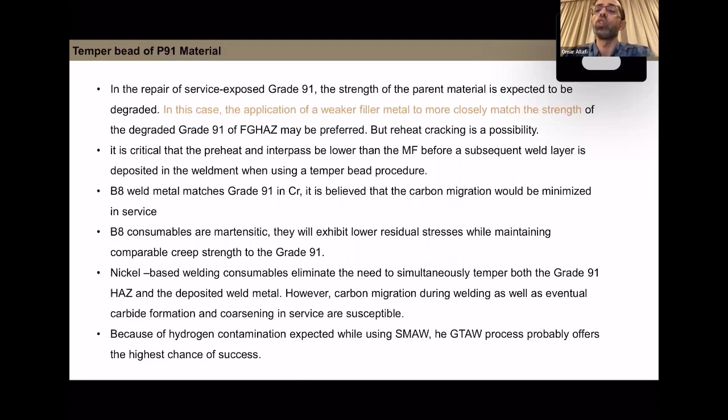Because of the hydrogen contamination expected while using SMAW and GTAW processes, using GTAW instead of SMAW offers the highest chance for success. So you have less hydrogen in the GTAW process.

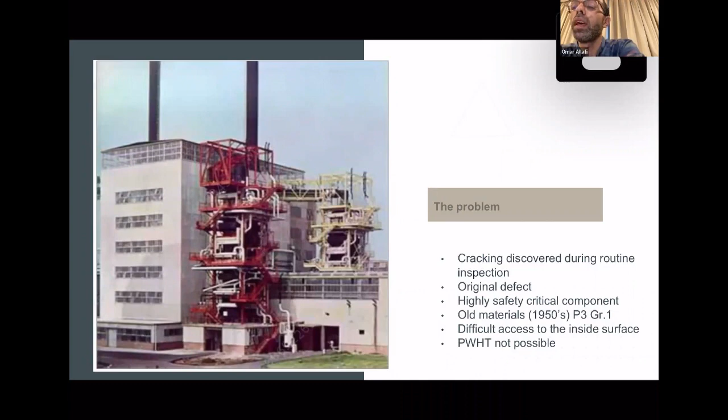The temper bead welding case study: I will share one case study where cracking was discovered during routine inspection. This is inside a steam drum. The material was old, from the 1950s. It was difficult to access on the inside surface, and PWHT was not practical.

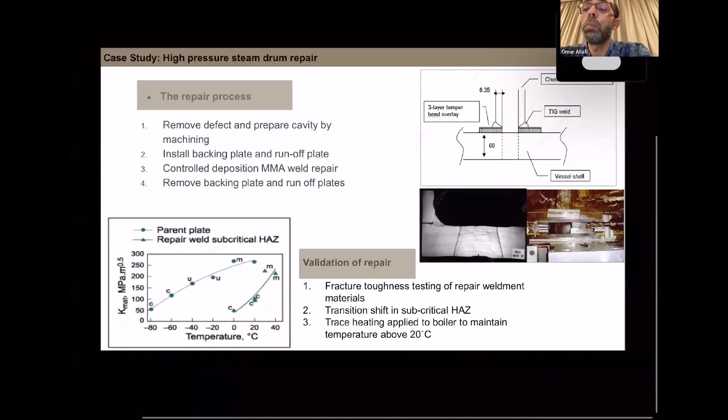In fracture toughness testing, the fracture toughness was slightly changed. As we can see here, the toughness of the weld has changed, so it has lower toughness at lower temperature. So what they did is they provided steam tracing to the weld joint to protect against brittle fracture.

And this is one of the cases where temper bead was successful as an alternative to PWHT. Again, this technique can be used as an alternative to PWHT, but if we don't know why we are doing this and what kind of parameters we are controlling, we'll end up with a catastrophic failure.

And this is one reason. The second reason is the competency of the welder, since it depends on the competency of the welder. Many users or owners do not prefer to go with this repair method.

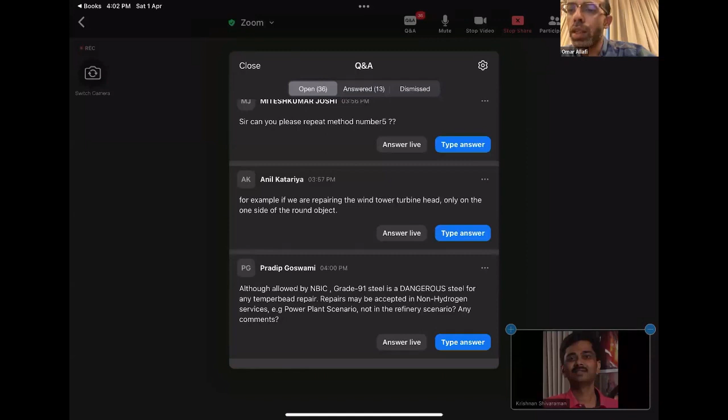Yes, although allowed by NBIC, grade 91 steel is dangerous steel for any temper bead repair. Repair must be restricted to non-hydrogen service.